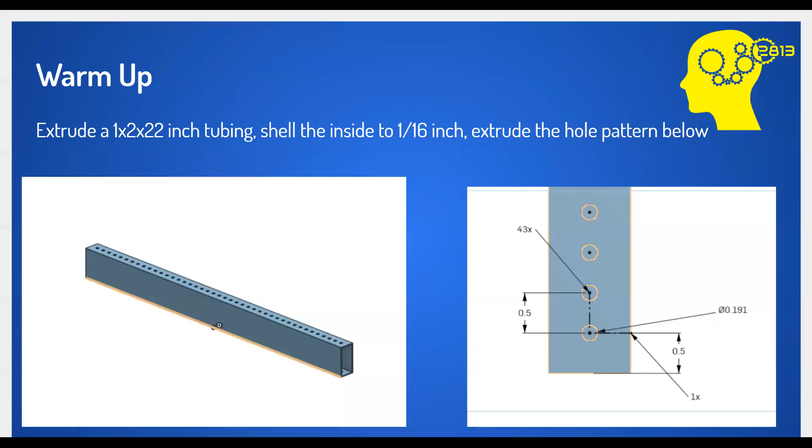Today we're going to be going over assemblies, importing CAD from WCP, VEX, and MKCAD. This is day 3 of hardware design training. So let's get started.

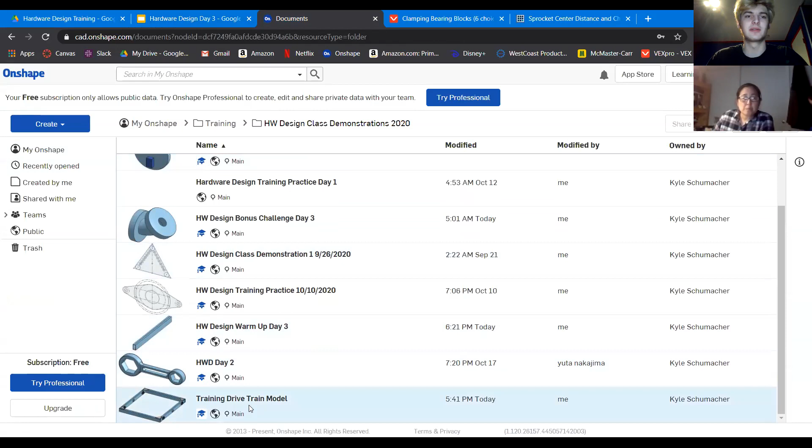So let's do a little bit of working with that. I actually just did this for a friend to show them how to do it. I'll delete all of that, and let's get rid of this. Okay, now it's completely blank.

So this is the Part Studio we made last time, and this is also new stuff. I'll actually delete this last sketch because I'll do it again today, and everything else is new. Or sorry, everything else is what we did last time. So we have all of these parts.

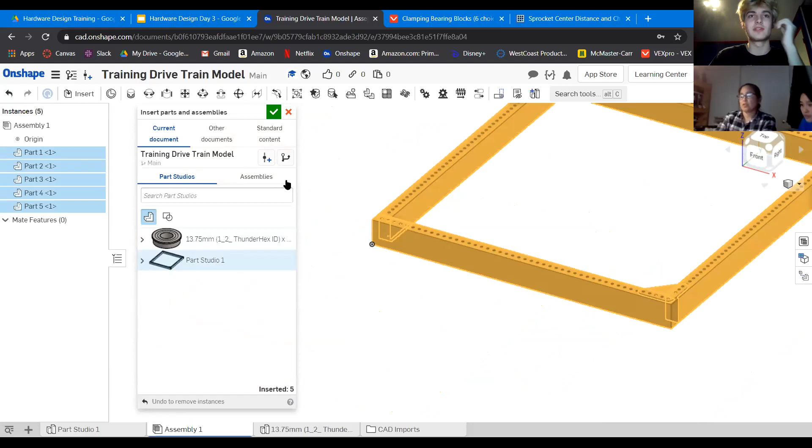And when we go into the assembly, we want to insert the new part, Part Studio 1. Let's make it a little centered. Okay, so when your mouse is in this area, it's going to default to the spot where it is at to the origin part, where it is in the sketch. So this corner right there is where I drew the origin for the first drivetrain sketch. So I'll check that. But none of these parts are fixed quite yet.

I just got an Amber Alert. That's not good. If there's any missing elderly in your area, please keep an eye out. Apparently it's a Silver Alert. Sorry, I was distracting.

Okay, so to fix this part, you're going to right-click on it and then press Fix. And now this can't move. All these other parts can move though, because they're all separate parts.

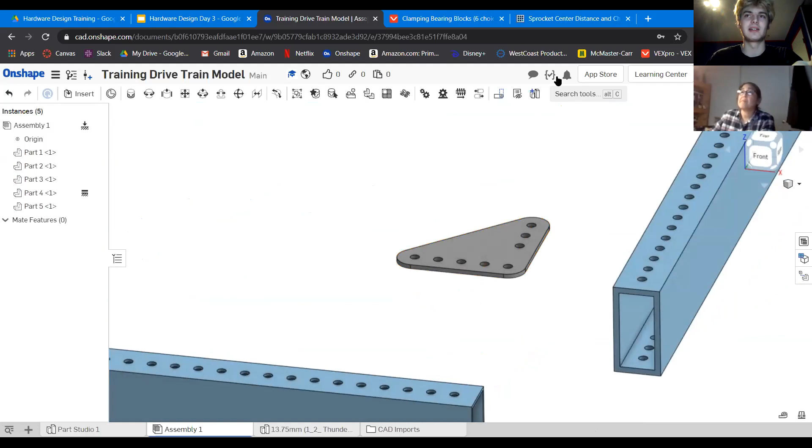So I need to mate them down so that they don't move. And to do that, you want to mate it in all the spots where you would mate it in real life, because that's the proper way to do it, so you don't have confusing things. So we don't weld these bars together, so you don't want to mate this face and this side. What you want to do is mate it at the holes in the spots.

Sorry, you have to go. Oh, okay, that's cool. Okay.

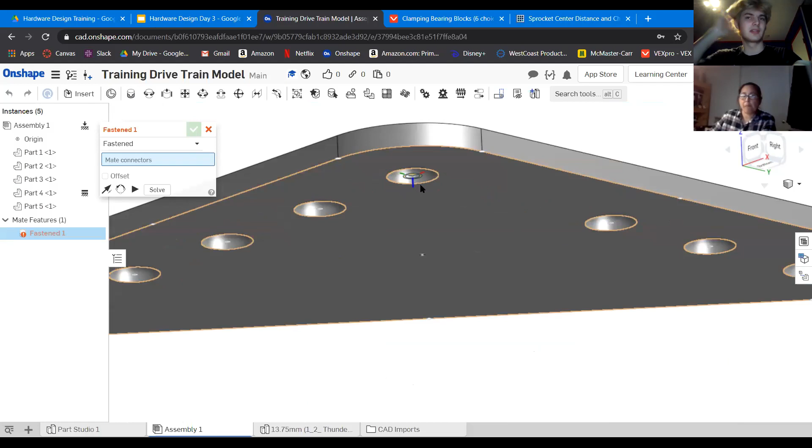So you're going to select Fastened Mate, or press M, and select the mate connectors. The mate connectors are automatically given based on the geometry of the sketch. So you can see there's a mate connector here, this little circle with the axes sticking out. You select that and then select the mate connector you want it to go to. So maybe I want it to go to this hole because I want it to connect there. So I'll select that and then they mate together.

Now, if this didn't automatically go to the right spot, I could also flip it around or rotate it to make it go in the correct position that I would want.

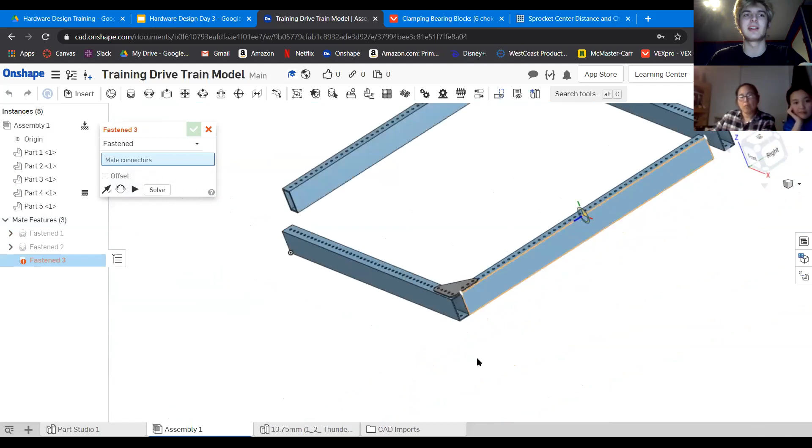So I'll solve that, and then it automatically opens up another mate, and I can start doing some more. So I want this part to also be connected to this, so I want it connected to this mate connector and this mate connector, and they snap together. It's pretty simple, and you can do that for all of them. But now we're out of things to connect because these aren't welded together, so there's no way to connect them.

So now we only made one of these parts. So what I can do, well, first one of the things I could do is go into this part studio and select the part and pull it out if I wanted another one. Or even easier, since I already have it here, I can select it and do a copy paste. So I can Control C and then Control V, copy paste it around the document. So now I have 3 others that I could put on, right?

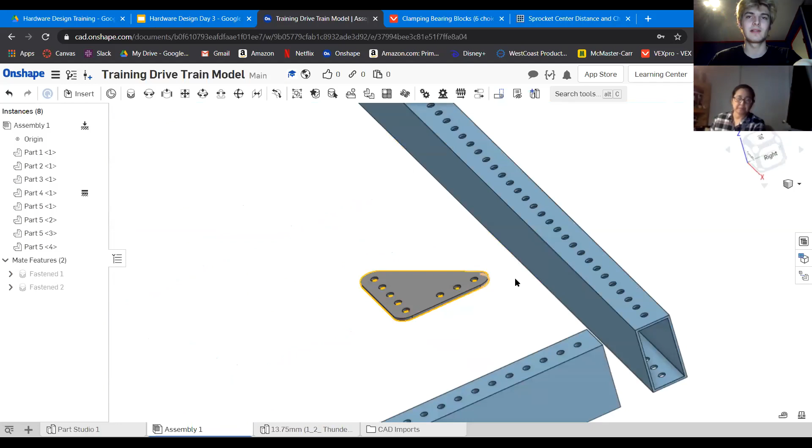So well, now I can mate them all up and flip that. And then it takes a little bit, but it just works. So that's cool.

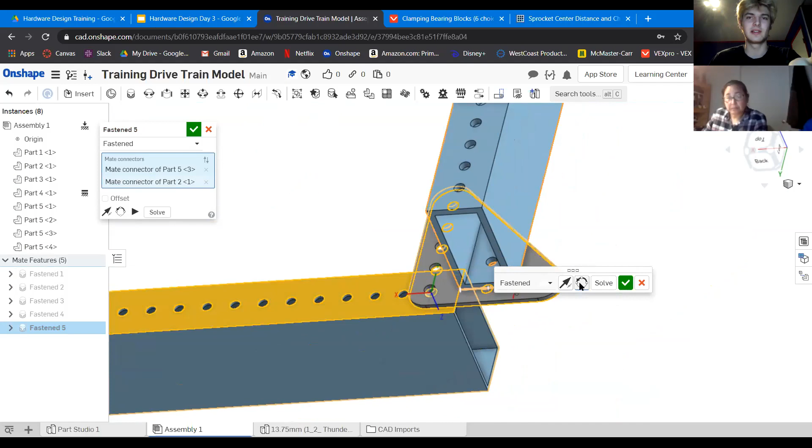So now I'm just going to go around and mate all of the gussets to all of the parts. See, this didn't go on the right way initially. I can flip it, and now it's correct. Like this, and put it here.

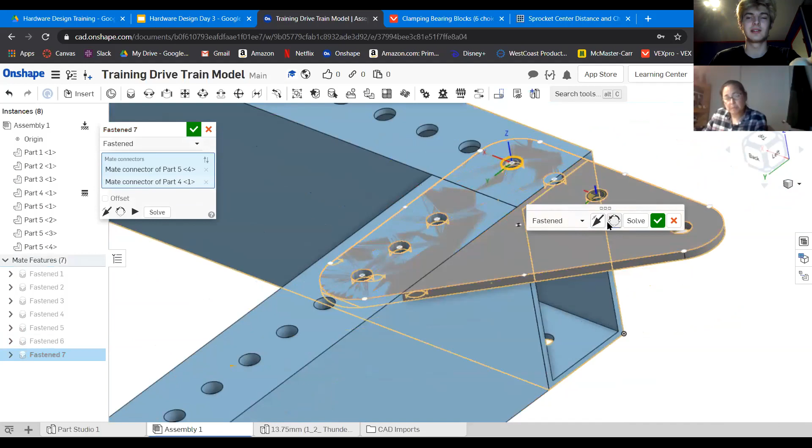And then for this last one, I can select it here, and then here, it's upside down now. I can flip it, rotate, and it's in the right spot. And I don't even have to mate this to this. I don't have to mate this piece to this gusset now, because this is already mated in place by this part in this gusset, and this gusset is placed here.

So this is already in the correct position. It doesn't need to be mated any further. Is everyone understanding this? Does it make sense? Do you guys know how to mate things now? Can you do like, yeah, thumbs up? I know you get it, Yuta, but like, okay, I want to know if everyone else gets it.

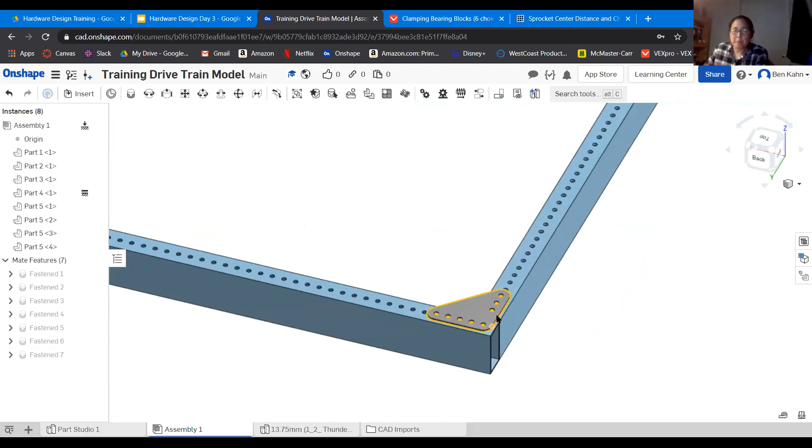It's like Ashton, Marcus, Pranesh. Do you guys all understand how to do it? Okay, maybe they're still working on their thing. I don't know. Okay, chat, kind of.

How do you flip it again? Okay, so I'll show you. So this is the first mate right here. When you're doing this mate, in this part, it says flip primary axis. It flips the side that's connected to the thing. The little arrow that goes back and forth.

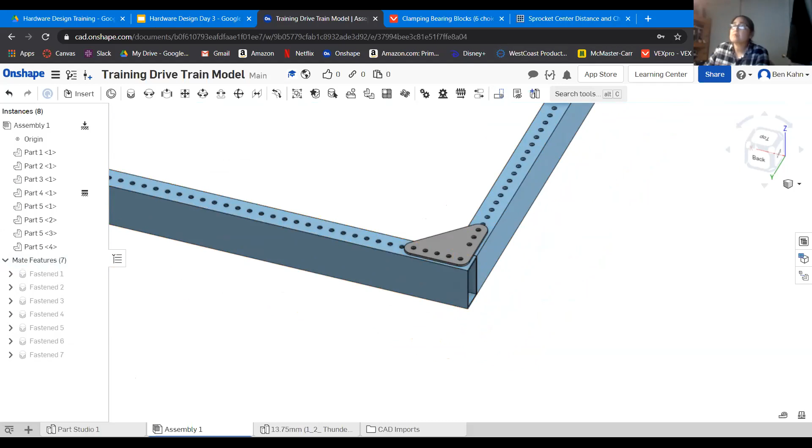Okay, cool. Can I move on now? Okay, I'm gonna move on.

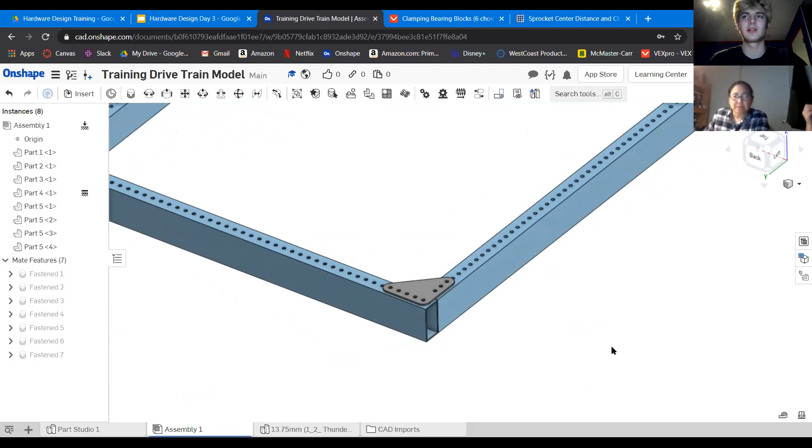So is everyone, since I'm not on that, on your... Yeah, I think Marcus and Pranesh said that they finished it or came close to finishing it. So yeah, I'm hoping at least, because I think that's what they said, but I could be wrong. But other than that, it's pretty simple. So hopefully you can pick it up.

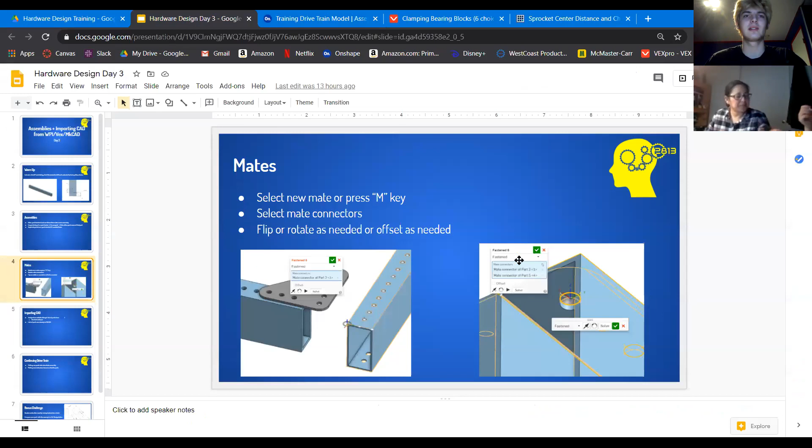Okay, so moving on, this is the last thing we're gonna go over: importing CAD. You don't always want to make all the parts yourself because a lot of them are standardized and you can just kind of get them from the internet or from the stores that we buy them from. So you can just download the CAD off of some websites, and then I'll show you how to import it into Onshape.

And I already did this earlier, so I'll just delete this, and I'll delete this too. So I'll show you how to do it. I was working with this earlier. So if I wanted to download a bearing and put it into my CAD, this is a website that we go on a lot.

If you just type in VEXpro, it should be the first thing that comes up. And you'll go into this sub website. There's a bunch of different parts that you can get from here, a lot of which that we use, like a lot of motors and different things. So bearings is one of the things we can buy. I think we have a different source for bearings now, but it's the same CAD pretty much. Like they're the same size.

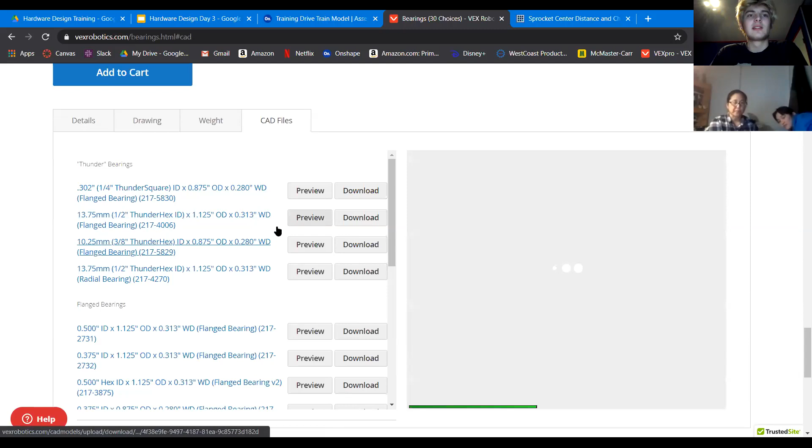That's what ID stands for. So you can preview the CAD on here to make sure it's the right thing, right? And then you can download it, and it downloads as a step file.

Now I already downloaded it. I don't want another one on my computer. So I'll just go back in here, and if I wanted to, I can press this plus button right here. Or I'll even delete this. I don't know why this is still here. Okay, well, it just automatically makes this folder that you can't delete, so that's fine.

So you would import a new thing and go, I think it's in my downloads. Oh, and it's gonna be slow today, isn't it? Okay. I really wanted to show you how to do this. Oh my God. Where did I keep it? Okay.

So once the files load for you, you're going to want to just select the file, and then it'll give you an option that says import to Part Studio or import to as its own thing. And you'll just not click anything and just press import, and it'll go into its own folder, and it'll give you a spot for the file and a spot for the part.

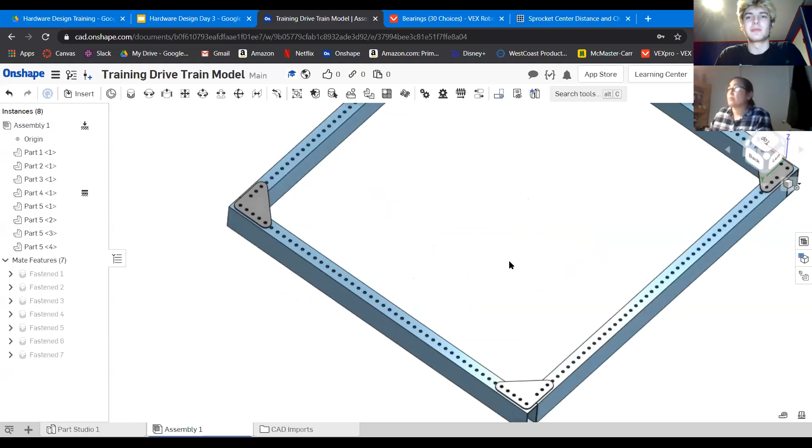It's not loading for me right now because my computer is being annoying. So whatever. It can be that way if it wants to.

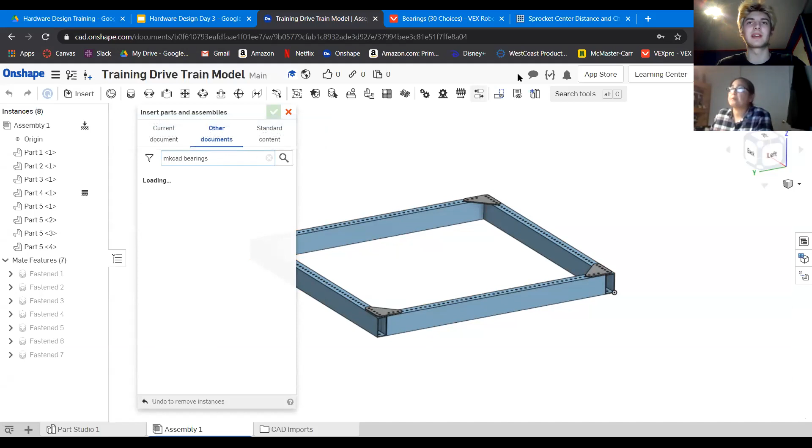Okay, and that was, I think, the last thing. But the important part to go over is that you don't actually need to do that, because there's a huge library of parts that you can get off of MKCAD that will download, even if my computer is slow. So if I go to MKCAD bearings, it's usually sorted by the names that it has on the VEXpro website. It'll take a little bit to load.

And then I can find the same part on here off of this library. So like this is the Thunder Hex 1.125 flange bearing. It doesn't say half inch, which is annoying, but it does say the part number, so 217-4006. So if I go on here, I can see it's the same part number, right? Which is this part right at the end. So that's the correct part that we want.

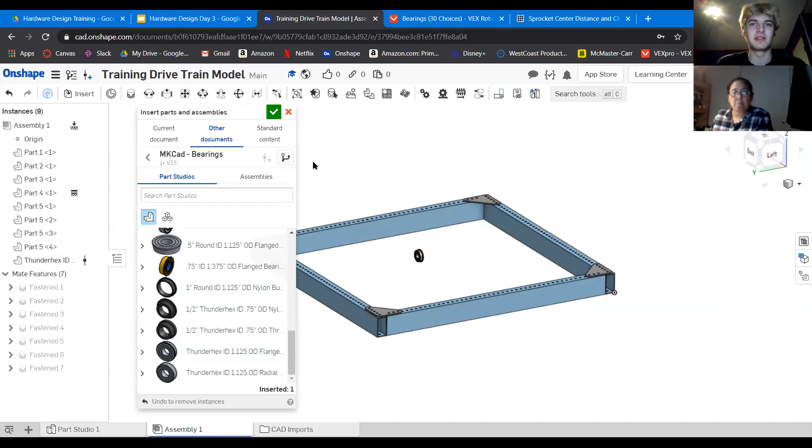So we would just click it and import it, and it's right here. And you have a new part in your assembly. You didn't even have to make it yourself. Pretty cool. Now we can just delete that because I don't want it. Okay, I think that was it.

So today we're just going to be continuing the drivetrain a little bit further. And I'm going to show you how to get the parts from VEXpro and make cutouts for them, which is going to be more sketching, but we'll put the parts into the assembly as well. This is going to be a sketch that is, I guess, on the more complex side, but not really, so you guys should be fine.

And also, if you guys want to do this bonus challenge, this was really fun for me to do, which means it was a little bit difficult. So if you guys want to kind of explore the sweep feature, which I didn't really go over too much, it'll help you out with this. This is some good practice.

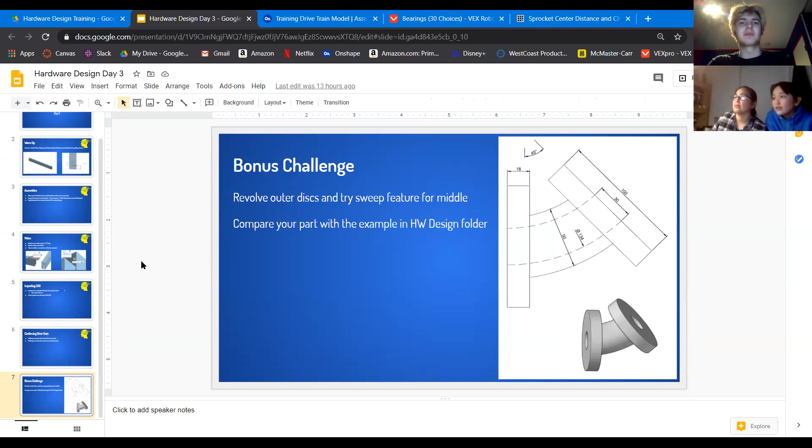So without further ado, let's start doing our drivetrain a little bit more. So we want to put wheels into this area right here. So to put wheels in there, we need a bearing and a shaft and a block to hold the bearing in place. But for that block to fit into this tubing, we need to make a cutout for it.

So we can actually find that block on VEXpro, which is the site that we just went on. And then it's going to be in VersaFrame. Actually, I think I just looked up bearing blocks. Bearing block.

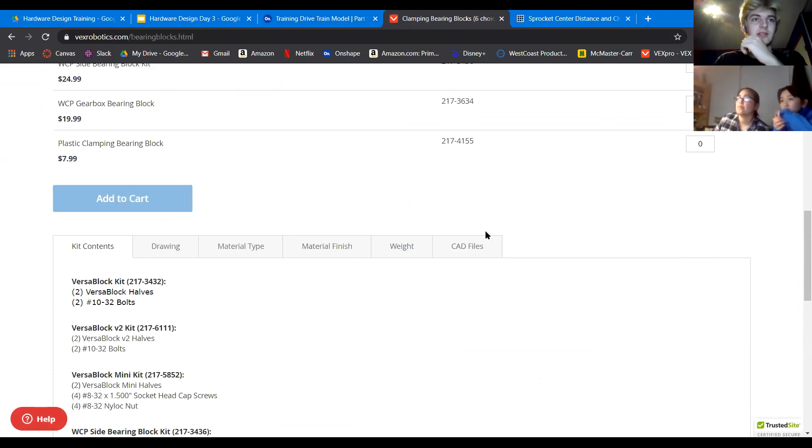Okay, so there's a few different options, but the ones that we normally use are not that one, this one. So we use this and this one for the sides, side wheels, and then this one for the gearbox wheel. So we'll start here, and we're going to go into these sketches.

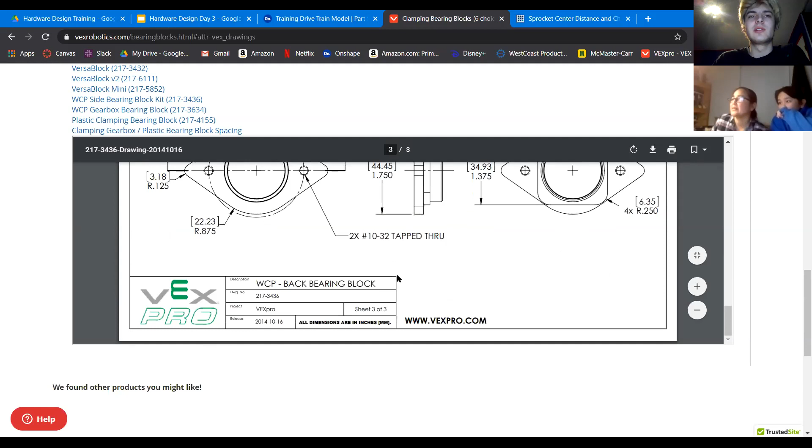And we're going to look at the dimensions that it gives us so that we can fit it into our drivetrain.

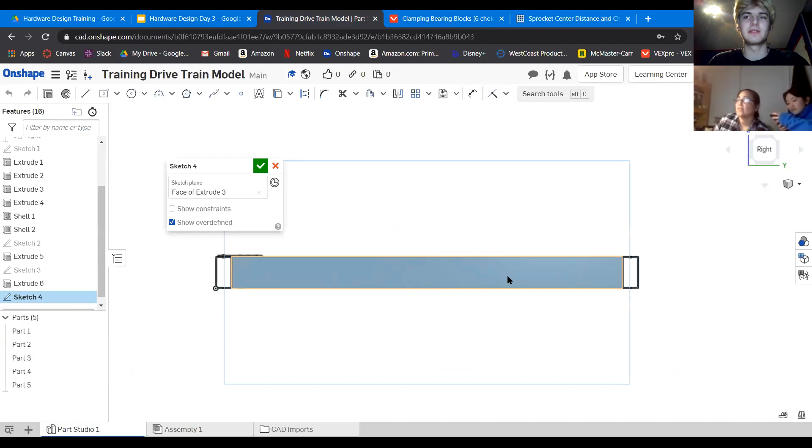Okay, so let's start with this one right here. Let's make a new sketch off the face of this side—this inner tube, the one surrounded by blocks on both sides, not the one with an open end. This is the side you want to put the wheels on.

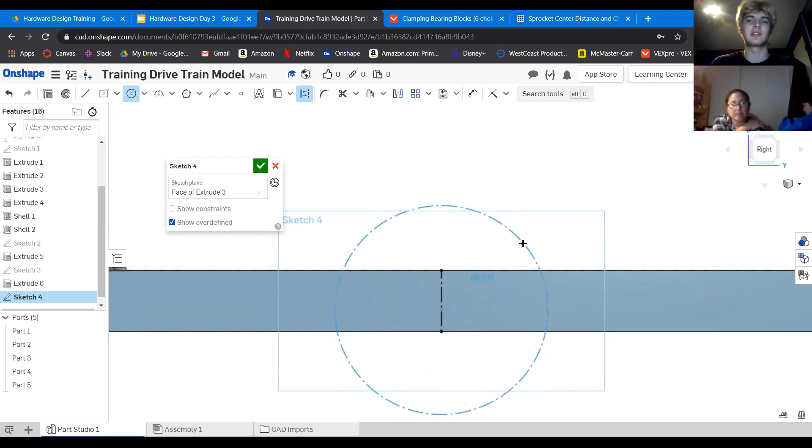Let's start our sketch by adding a vertical mirror line just in case we need it, and then we'll start CADing out the wheels. We'll start with a circle, and we don't want to put it in the center because we want it a little lower so we don't get stuck. These are going to be construction lines because we're not actually extruding the wheel here, we just want it for reference.

This is going to be 4 inches, because that's how big our wheels are. We also have 6-inch wheels that we use sometimes, but we'll just use 4 inches for this drivetrain. During build season, if it happens, we'll figure out which wheels we want to use. Like last year we used 6 inches because we had to go over a bump in the course—that was part of our design.

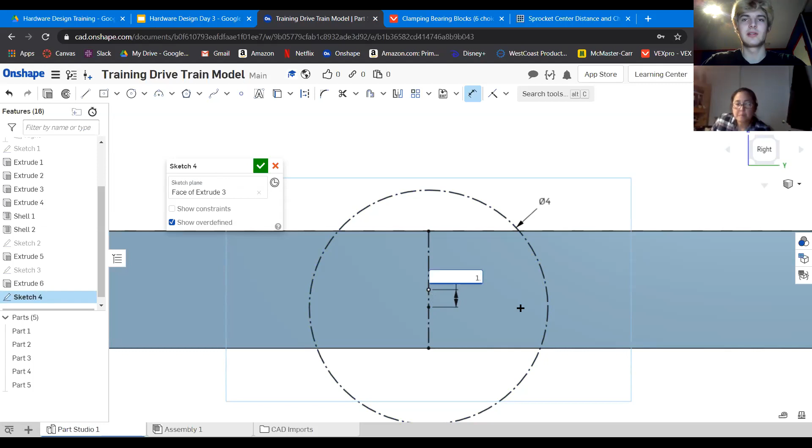Now let's give this a bit of a center drop—let's call it 1/16 of an inch—just so it's a little lower and has some tilt to it and doesn't get stuck or beached, because flat wheels can be bad, especially in a West Coast drive. Now the side wheels, we do want them in the center because we want them higher up than the bottom wheel.

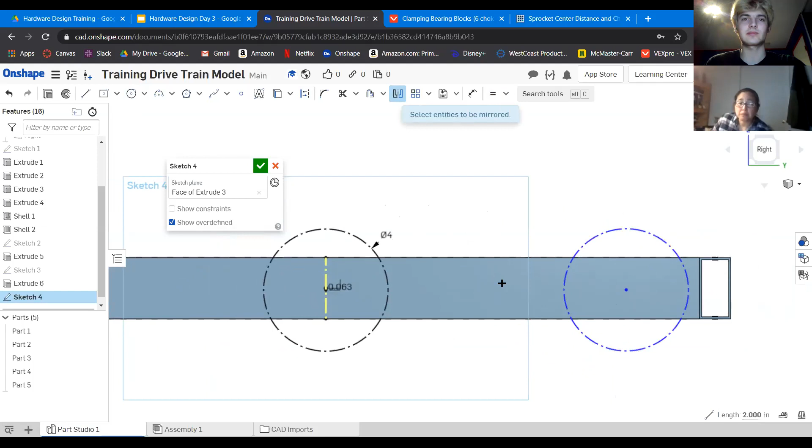We're going to make that construction and make these two of equal size, and then we'll mirror this over onto the other side. Then I want to make all 3 of these. This is the center point, not the wheel point where you're putting it. I want these all to be horizontal and of the same distance.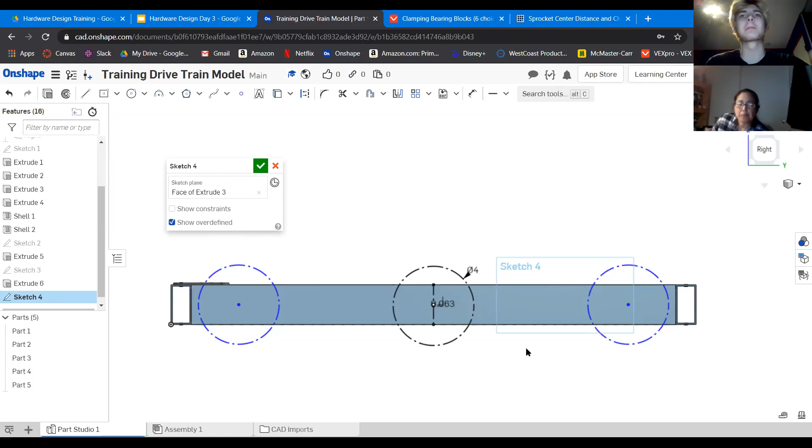Now I want to space them out accordingly. We'll go into this more next week, but the spacing from center to center is going to be based on how many links make a full link in a chain. Our chain pitch is 0.25 inches, and our sprockets are 16 teeth each, so I got a center distance of about 9.5 inches that I'm able to use. It really works for any multiple of 0.25, I think.

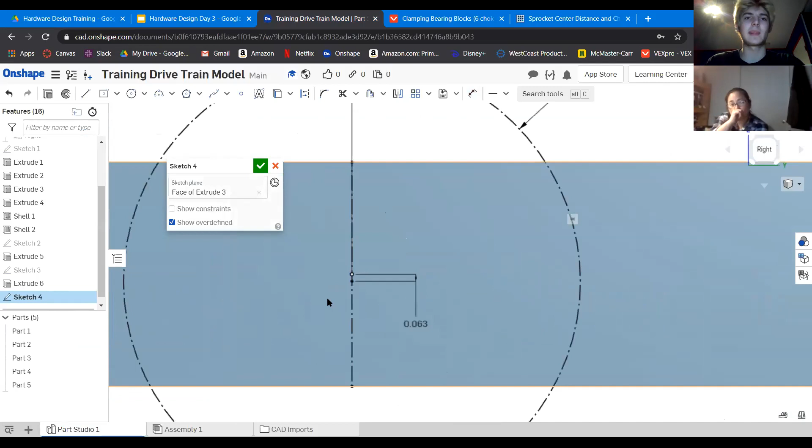So I want to select this for the dimension to the side and call it 9.5 inches. You don't want to select this bottom one because it'll make a very slight triangle or angle—you might not notice it if it switches between horizontal distance and angle distance in the CAD since it's so minimal. But the chain is really, really touchy, so even a slight difference in horizontal distance can make a really big difference in chain tensioning, which we'll get into more next week. These are mirrored, so it's the same distance and you know where it is.

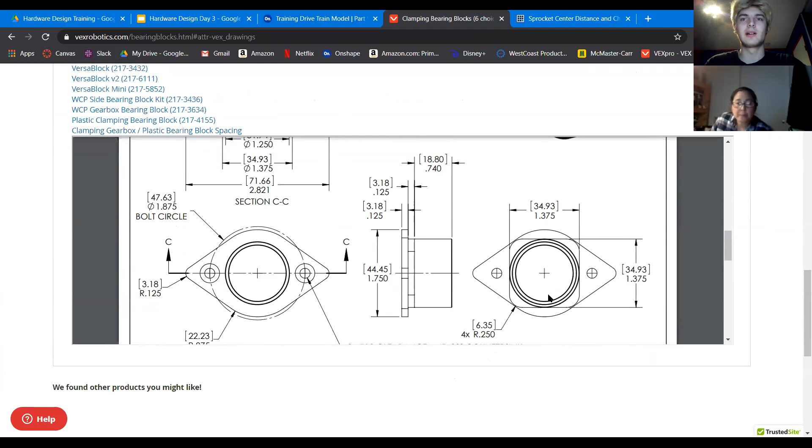Okay, that was some other stuff. Now let's get back to these bearing blocks I want to put in. So how to explain this—there's this kind of curved square that goes into the tubing that you press it around, and that holds a bearing in this slot right here. Let's make this shape in the tubing.

So let's do a rectangle, and over the dimensions—you can see right here it's 1.375 by 1.375, so 1.375. I could make this equal, but I want to display the dimensions, and I also want it to work with the fillet we do in the next step.

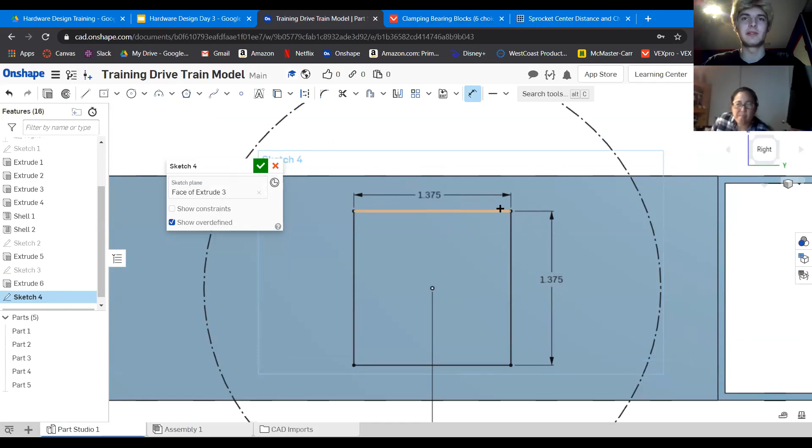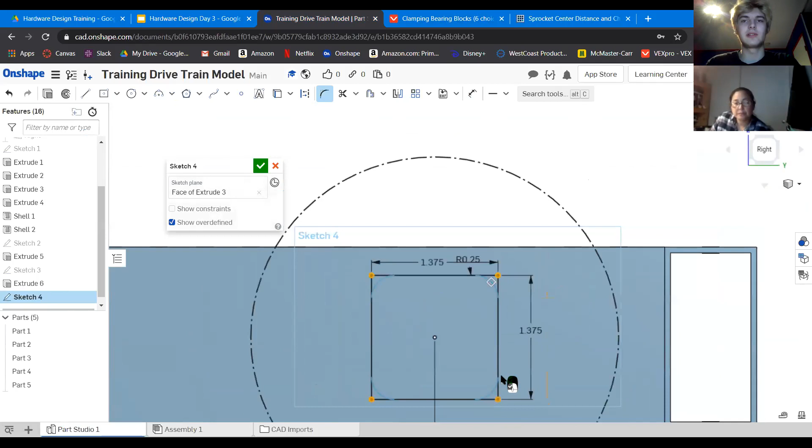So I can do a sketch fillet—that's this button right here, which is the same as an extruded fillet you'd do on a 3D part, but it only occurs in the 2D thing. It just makes curves, pretty much. You can set all of those, and the radius is 0.25, which is the one we needed. Cool, so we'll set those—it's all defined.

We also need holes on the outside to mount it. So these two holes also need to be made to press it in—this presses in, but it also has these two so you can bolt it in and it's nice and shut. So you have to find the hole dimensions, which is right here. This is called a bolt circle, which follows a radial path, and you can see where the bolt would be on the outside when mounting it.

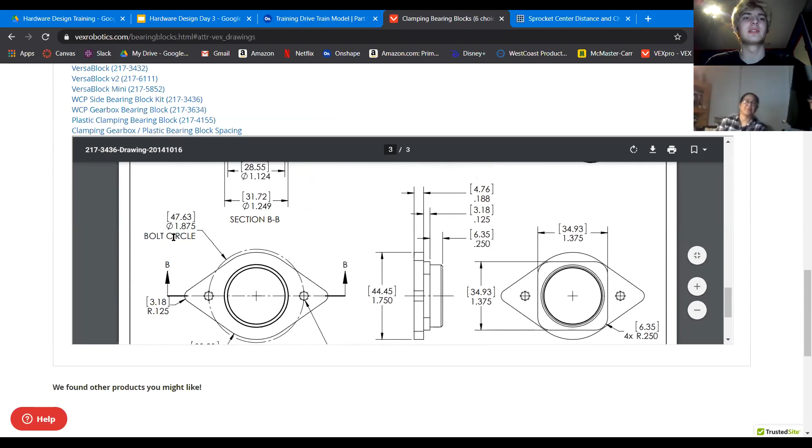So this is 1.875 inches for a bolt circle. And then these holes are number 10, or 10-32 bolts, which all you need to know right now is that the hole size is going to be 0.191. If you have any questions about different bolts, I can talk to you about that later. So, 1.875, and then you're going to want a circle horizontal to the center of the part, and call this 0.191.

And then mirror this over.

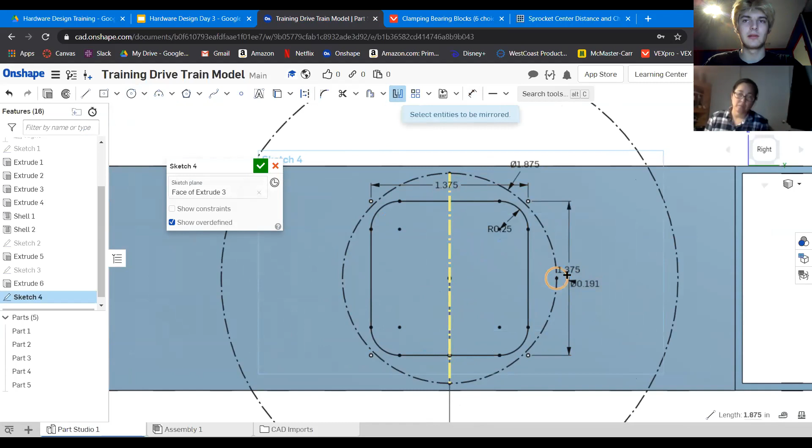Now I have two holes. I want to mirror the whole thing over so it's on this side too. So I'll do a mirror, select this line as the mirror line, select all of this, and it appears on the other side just like we wanted it to.

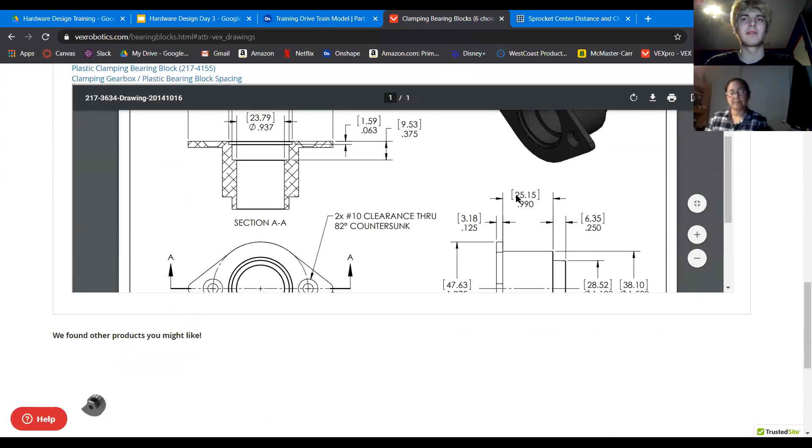Now we have to do the hole here in the center, which is going to be a different part. I don't know if it's on this PDF, I think it's on a different one. This one—right, this is the gearbox bearing block, and we usually put the gearbox in the center.

You can also put the gearbox in the back or the front, but that's some different drivetrain stuff, and you can play around with that later if you'd like. It's not too complicated, it's just a difference of where you place the double sprocket. But we'll get into that later also. Hard to not talk about these things we haven't learned yet.

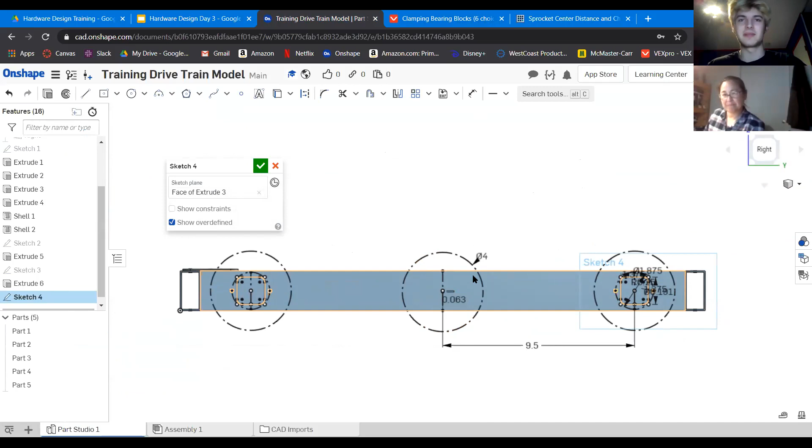Are you using a different bearing block because the motor is driving the center wheel only? Mm-hmm. So this is the block that goes to the gearbox. So on these side situations, you're going to want the block on both sides.

Oh, someone is rolling something outside my room.

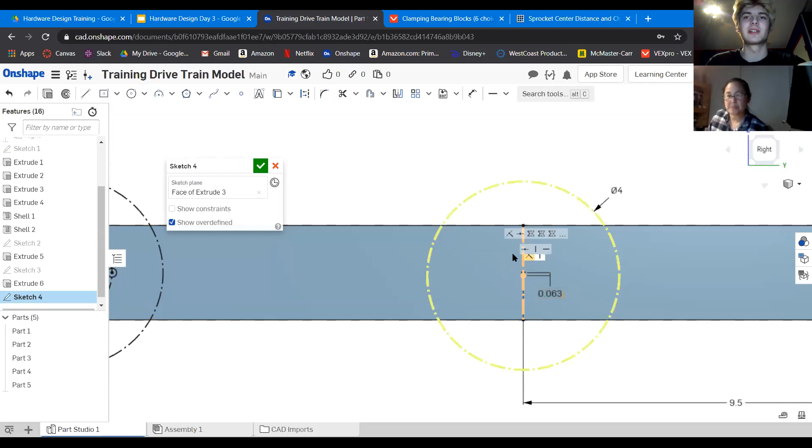So you want the block on both sides so that the shaft is retained on both sides. But the shaft is only retained by the gearbox on one side, and then the other block is on the other side. So they just make it different.

And the gearbox is where the motor is housed? Is that what we're talking about? Yeah, the gearbox has the motors and the reduction gears, and it outputs a shaft which goes into the bearing, which goes into the block, which is what we're making a hole for. So yeah, I probably should have clarified that.

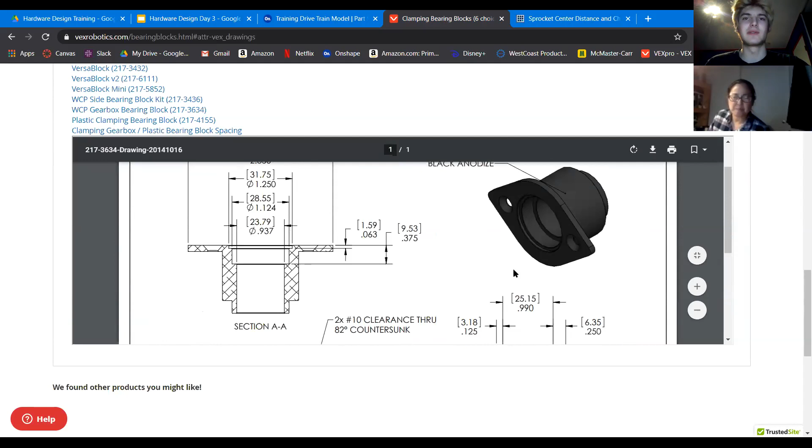So this kind of just goes into the tubing hole that we made, which we'll do today. This also has a bolt circle, but the part that goes into the tubing is this fat part right here, and that has a dimension—you can see in the side view here—of 1.5 inches.

So I can go over, put the dimension at the center of the wheel, not at the center point right here—it can be easy to mix those up. Set that to 1.5 inches.

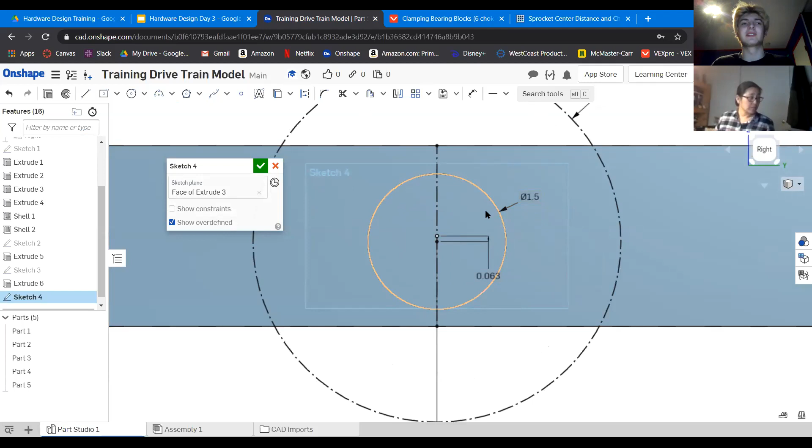Actually, usually what we would do is even tolerance it a little bit more. I'll teach you about tolerancing later, but it pretty much just makes things a little bit bigger, because when you actually put things together, it's really hard to get a 1.5 inch piece into a 1.5 inch hole. You want it to be a little bit bigger so it's a bit looser, but not too loose so that it falls out.

So a lot of times we'll say like 1.5 plus 0.003 or something, so like 3/100ths—I think that's right. I don't know, I'm bad at math, but yeah.

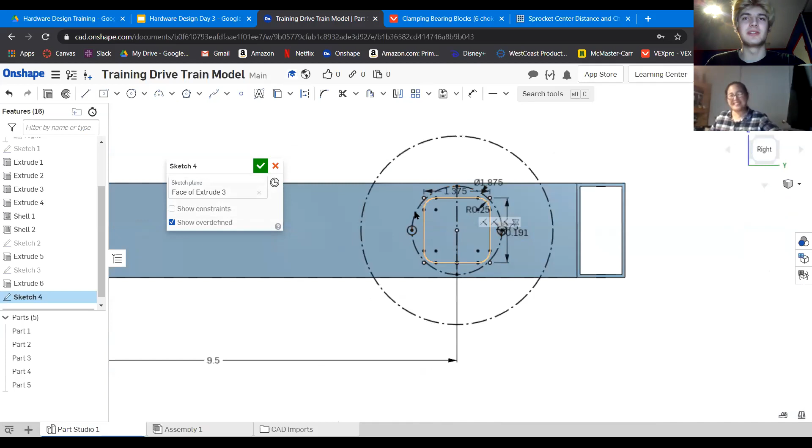We could also do that over here with an offset or something, but that would be a little bit messier. Actually, yeah, let's do it. Did I teach you guys offsets?

Yeah, so you just want to press O and select all the spaces that are going to be offset. And then you can set the offset to... actually, we don't even need to do that.

I think we can just change this, yeah. So I can put it to 1.375 plus 0.003, and set this to 1.375 plus 0.003. And that should keep the same thing.

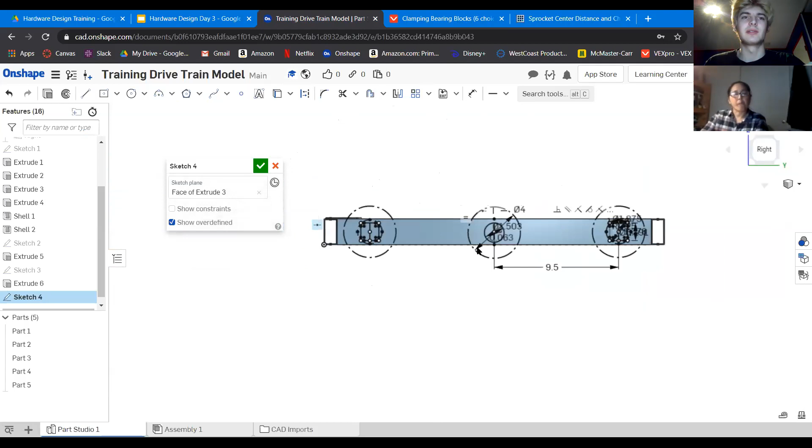I was worried about the fillets because I thought they might change, but I don't think they will. And it should change on this side too, because it's mirrored. And I think it did. So, yeah.

So now what we're going to do is put a bolt circle, which remember was 1.875. That's a different line—call it 1.875. Was it? Yeah, this bolt circle hole.

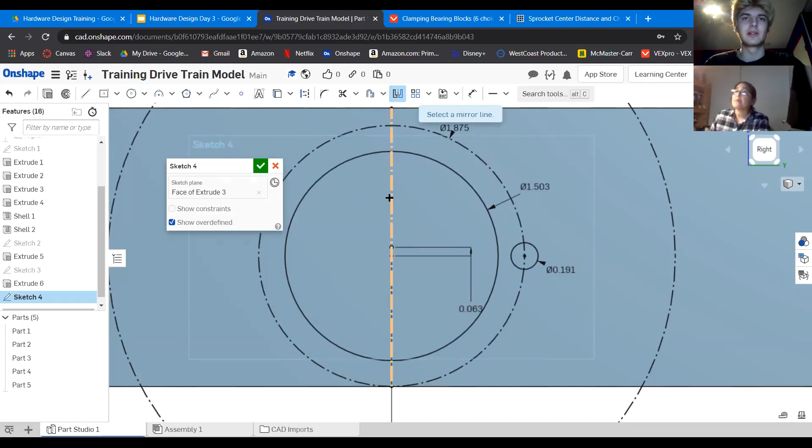And then we can put our circles horizontal to the center of the wheel and call it 0.191, and then mirror this over. Now we're all done with this part of this sketch.

Okay. Does anyone have questions about what we just did?

Or why we did it? Or why we did a certain thing a certain way?

Can you clarify again why the center wheel is not centered on the drivetrain?

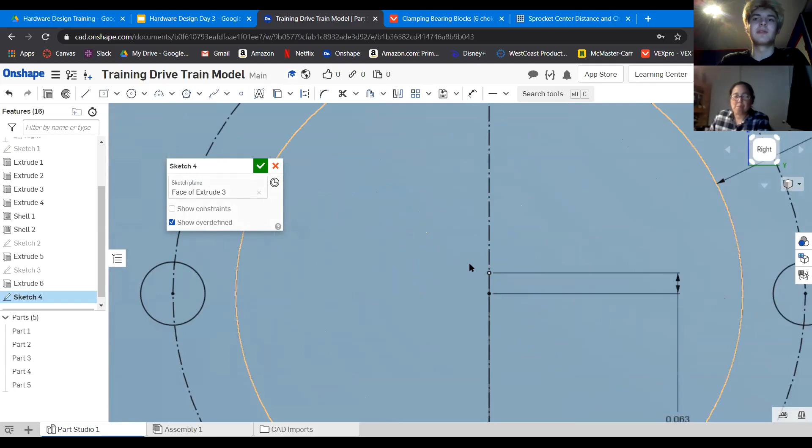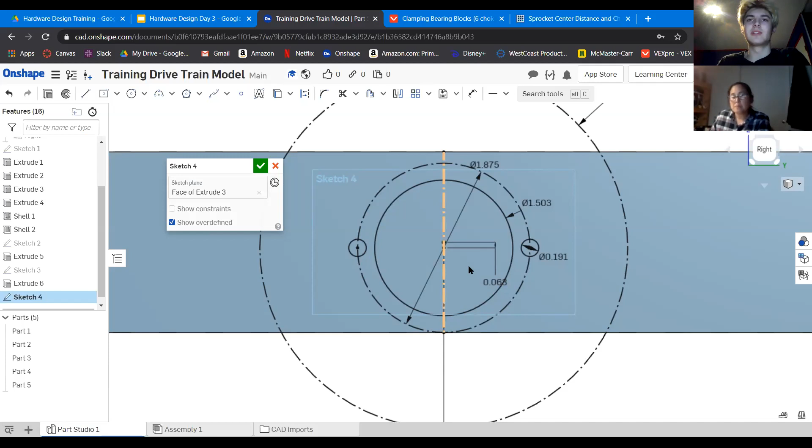What is the frame drop? We call it a center drop because we put this wheel ever so slightly lower than the actual center of the tubing, right here. When you're driving with all 6 wheels flat on the ground, it can get beached pretty easily if you come up to a ramp or something and have 2 of your wheels stuck on something. So this gives it a little bit of a tilt so it can move forward. These ones are a little bit off the ground, but not really—they're all on the ground, but this one's a little bit lower. It's kind of hard to explain, but this is just one of those trust-me things. You want to do this because it helps with the ground if you're tilting it.

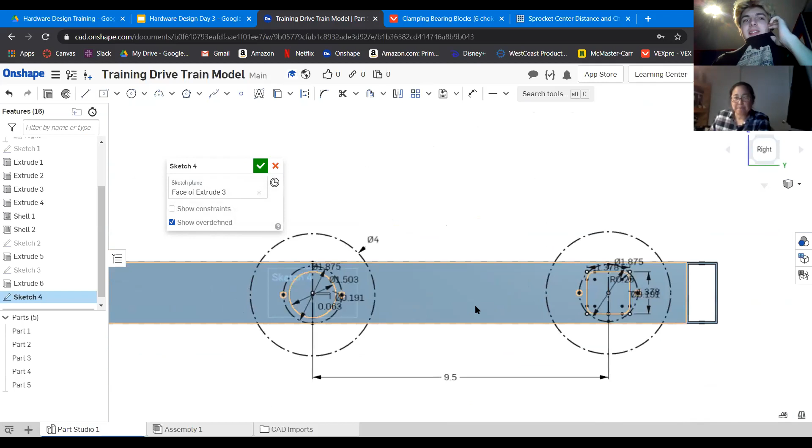Okay, so anything else from the audience? You drew in, sorry, I'm just going to keep asking questions. You guys chime in when you have other questions. Yeah, that's fine, I'm probably the least knowledgeable about robots, so I'm just going to ask.

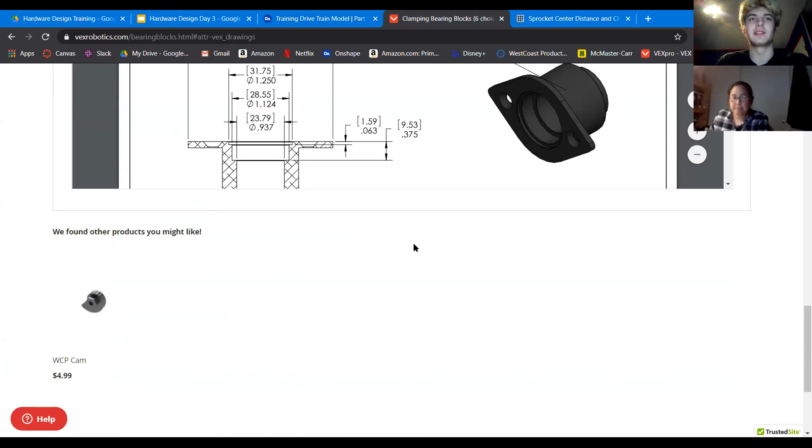But the parts that we drew, the rectangle with the filleted edge at corners and the 2 bolt holes, are those going to be sent to CNC to cut out, or how is that used? Yeah, you mean how we cut out the tubing? Yeah, we cut this out on the CNC. This is actually filleted because we wanted it to fit this piece right here. But it works well because they know that people are going to be cutting it out on a CNC, which can't do sharp corners.

The CNC just takes this file, or how does it communicate with the CNC? How does the CNC understand to cut these out? Do you convert the file to something it understands, or does it just take an Onshape file? I guess that's kind of a larger question, but yeah.

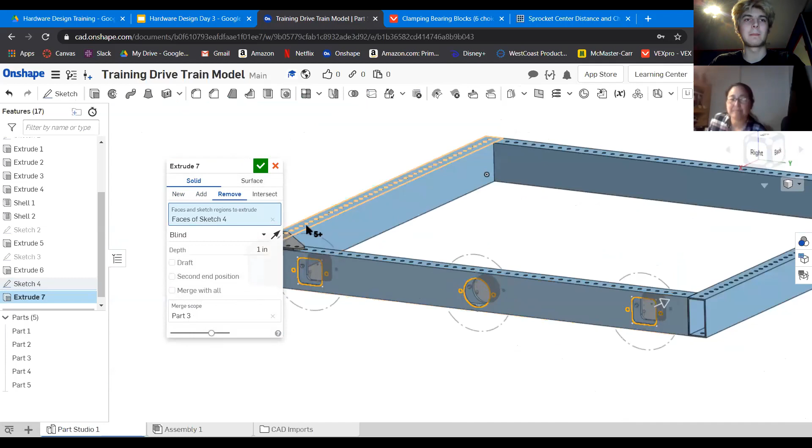If I wanted to CNC something, let's extrude this first and I'll show you how. I want to remove this, and then we'll do it on both sides, even though these aren't the same part, remember. It's going to cut through all, and in the merge scope we'll add this part so it affects this part also—we're cutting through both sides, the holes affect both sides.

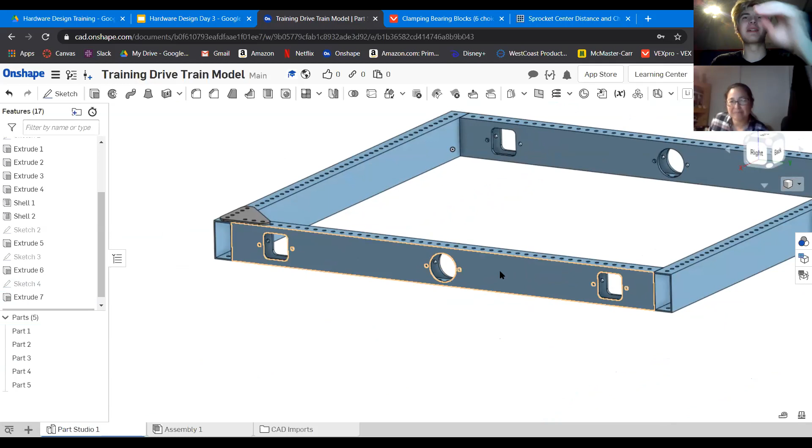Okay, so if I wanted to CNC this, which is not what I was planning on going over today, I would select this face for the tubing, then export as a DXF or DWG, download it, and go into Cut 2D Pro—I'll show you.

The fabrication team will go over CNCing and stuff, but you hand it over to Fab, right? Yeah, just hand it over to fabrication, give them the CNC code. Actually, a lot of people in fabrication know how to do CNC code, so they should be able to do it also. But yeah, it just comes out like magic—it just appears in our hands so that we can make our drivetrain.

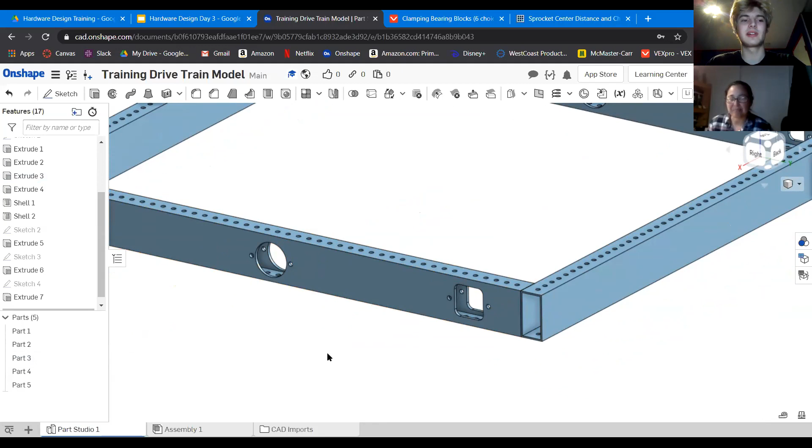Okay, so now that we have these holes cut out, and you can see the spots where everything is supposed to go, we can now put our different pieces in. So let's go into Onshape, and let's go to VersaFrame, because that's the section of VEXpro that we're in—when we go here it's VersaFrame, all of this stuff.

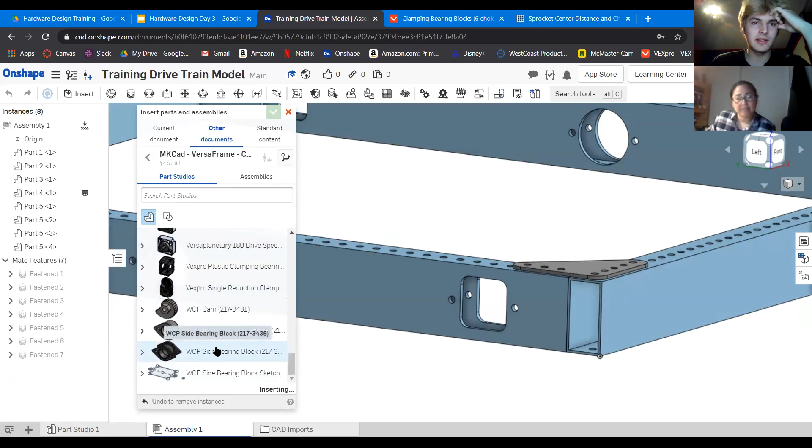So what we're gonna want is this thing, right, because this is the drawing that we looked at. So these are actually 2 parts—it's just a part studio. We'll select these and group them together because they are mated in a specific way. These aren't flat up next to each other.

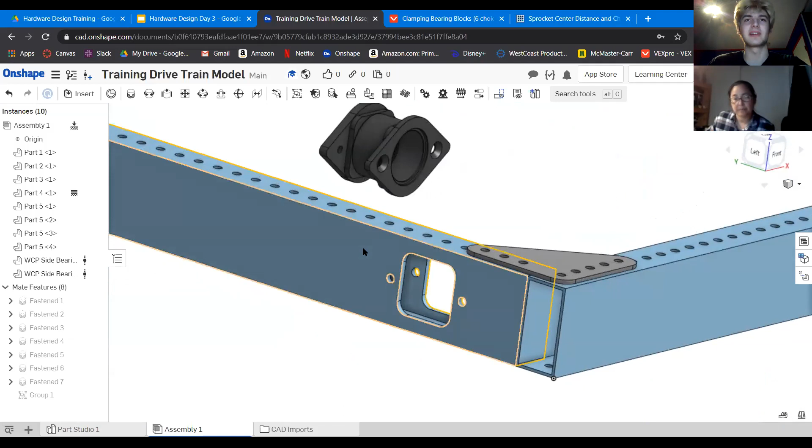There is a 30-thousandths... spacing in between them. Otherwise it would crush the tubing because it's just ever so slightly bigger, just to make us work for it. So now we can mate it here because this is where the bolt would go, then mate it to this spot, right, and we can see it all lines up. All right, everything works, check that.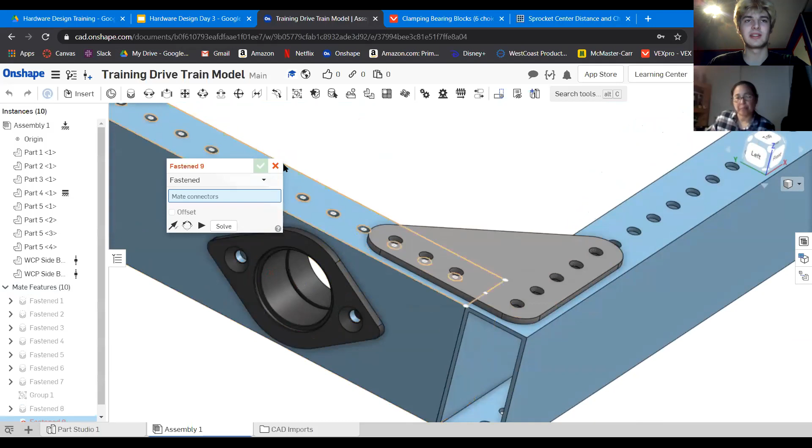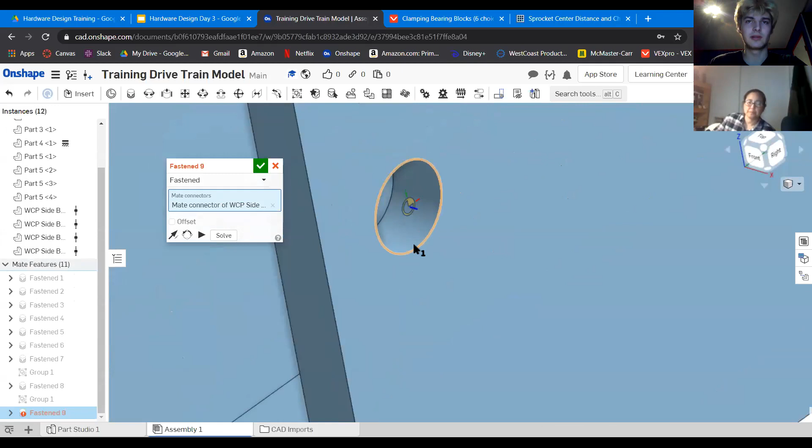It's solved. Okay, now I think if you guys are okay with it, we can do some linear patterning. I'm gonna check the interference here—it's not, no interference. Okay, so we will linear pattern. Actually, I'm gonna do it on both sides, so I'm gonna copy paste this group, and it's still grouped together. Then we can do it on the other side. Mate this spot to here, flip it and rotate. And we're good.

Check interference - no. What I'm doing here is checking if Onshape sees two parts intersecting; it'll show red cross hatches to indicate interference, so you'd want to change something. But you have to check it first. Since there's no interference, it won't show anything.

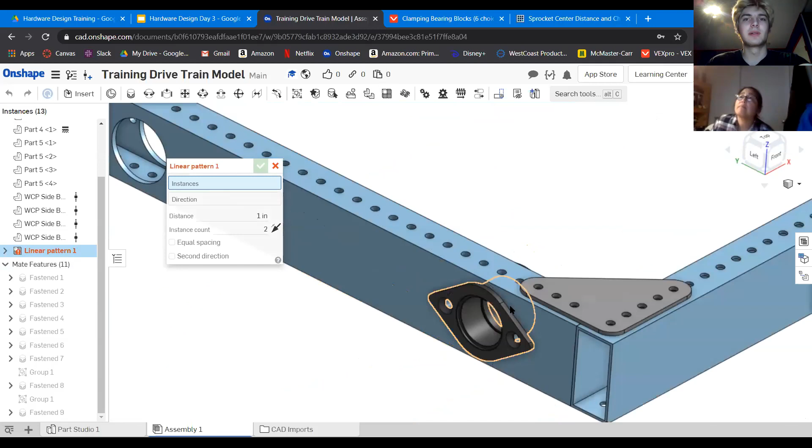So now I can do a linear assembly pattern. What I want to pattern is this part, this part, this part, and this part. The direction is going to be just this line, or actually any of these lines would work - it's just showing the linear direction you want to pattern something in. You can already see it's patterning right here.

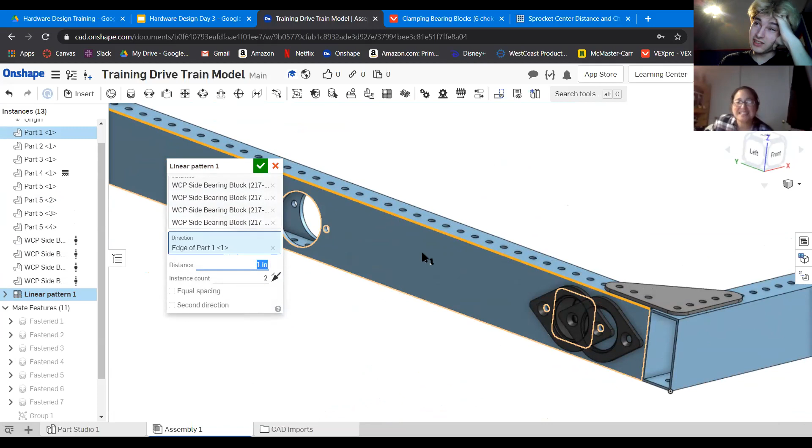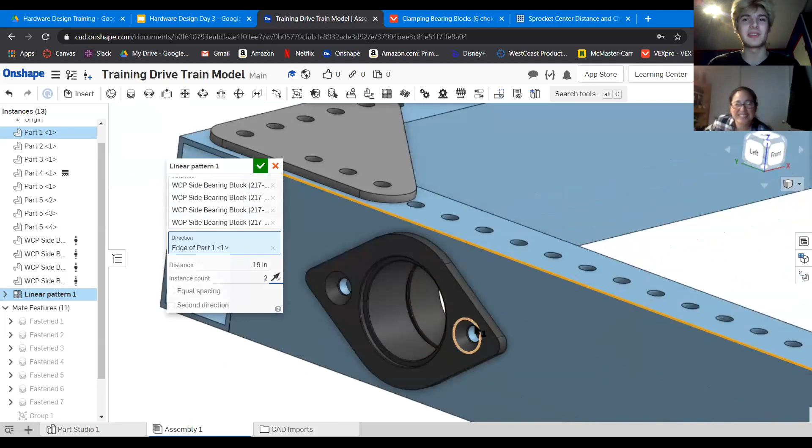The distance is going to be 2 times - I think we put the wheels at 9.5 inches away from the center, so 9.5 times 2 is... 19, yes. This goes in the other direction initially. Thank you, Yuta, I'm sorry, my brain is not good at addition. I can do complex integrals and derivatives, but not addition - my brain just does not work with addition.

So those are linearly patterned. You can also do a circular pattern, and it works the same as you would with a sketch linear or circular pattern. So now we have those two in there.

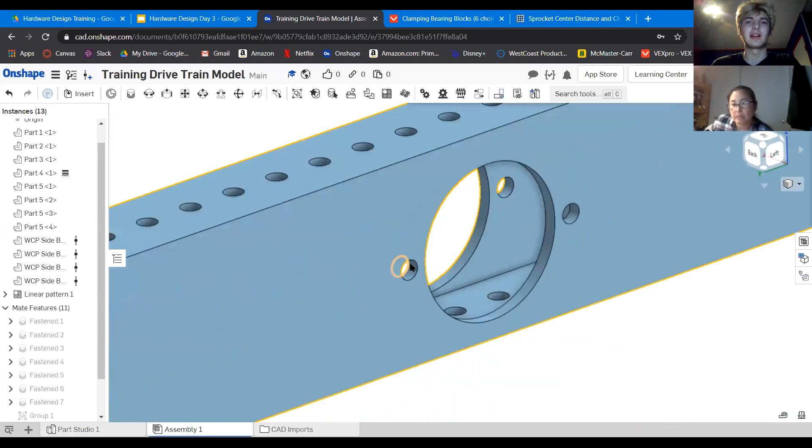They're ready for bearings to be put in, which we could even do right now if we wanted. I'm not going to put this part in the center bearing block yet, because you actually want to put that with the gearbox, and that's how you attach it in there. But we'll get to that another time - you guys are going to like gearboxes, those are fun.

So now I can put in some bearings. Let's go into MKCAD bearings. If you guys don't know what a bearing is - if you ever had one of those toys that were really popular like two years ago, fidget spinners, those are the things that spin around in the center. You have a skateboard, the wheels are also on bearings.

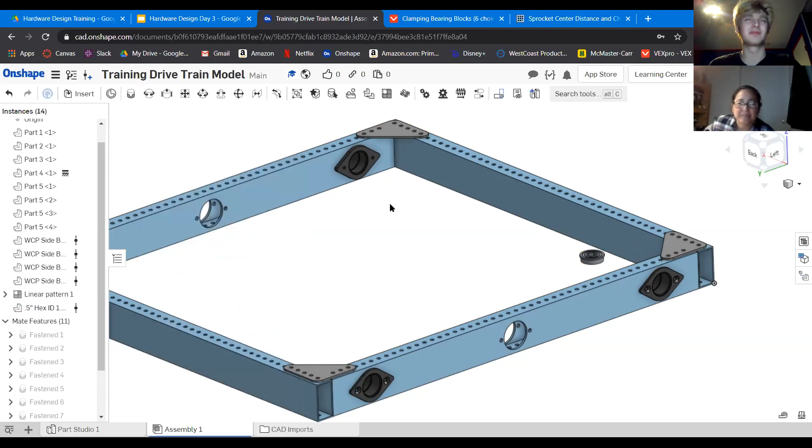Yeah, skateboards too. So I want a flanged bearing with a 1/2 inch hex. I'm not going to use the 1/2 inch ThunderHex because these are like really high torque mechanisms, relatively high. Usually anything driven by a gearbox, an actual motor that's torquing it, you would want an actual hex that lines up with this spot, not one that just kind of goes into a round part.

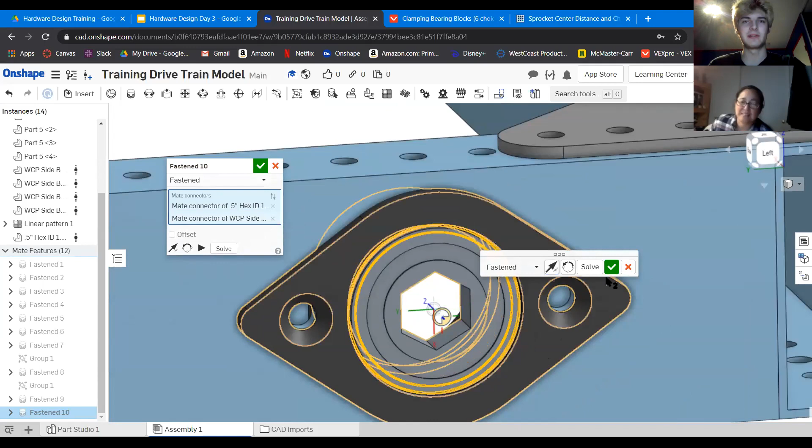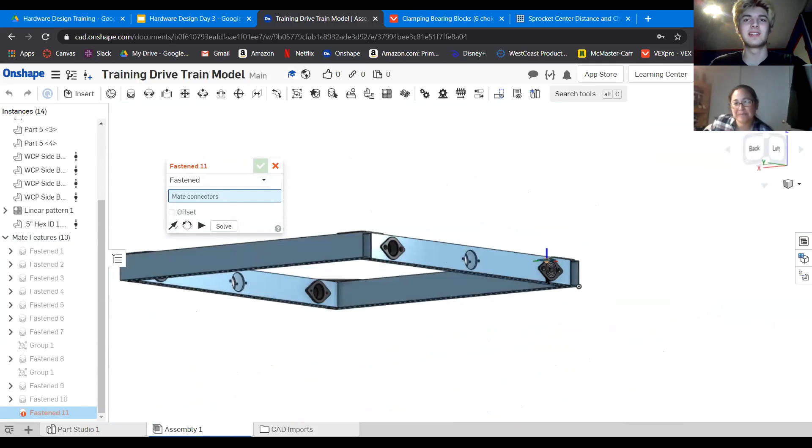So I can mate this side, which is this mate connector right here, and just pop it in here. It's backwards, so I can flip it, put it there. You know what really bothers me is that Onshape does not have assembly mirroring - that's the only thing I don't like about it. Every other CAD program I've used, like SolidWorks and Fusion, they have assembly mirroring so you can just flip it onto the other side. Doesn't do it here. Does not want to.

But that's fine. So I would want another bearing, put that there, and let's mate it - that's the right mate connector to this face, flip it, and it's in. I think I could linear pattern it onto the other side, but that would be kind of difficult to get the right distances, I think.

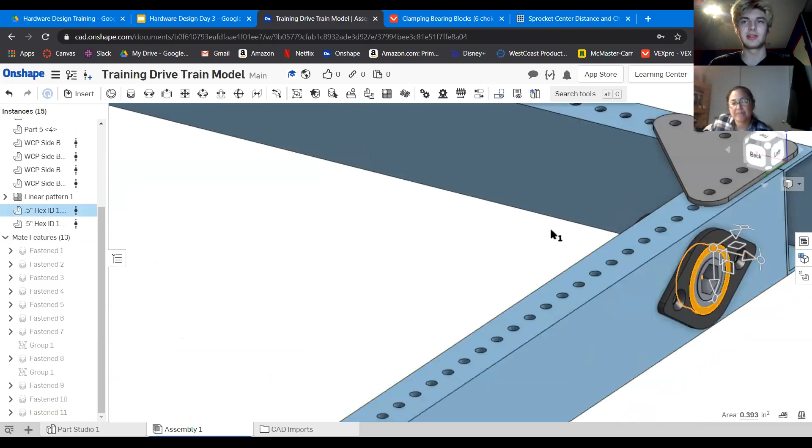So let's just - what did I just do? That's not good. Like that. Two of them over here, and it's not the best spot, but it works. Pop them in here. Good.

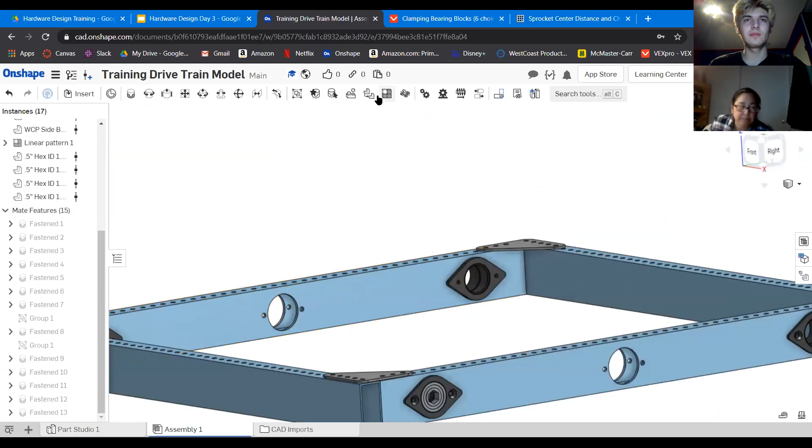This last one, and then we'll just assembly pattern it onto the other side. Let's do a linear pattern: 1, 2, 3, 4. Direction at 19 was the distance, and one in the other direction, and it goes right there. It all works out.

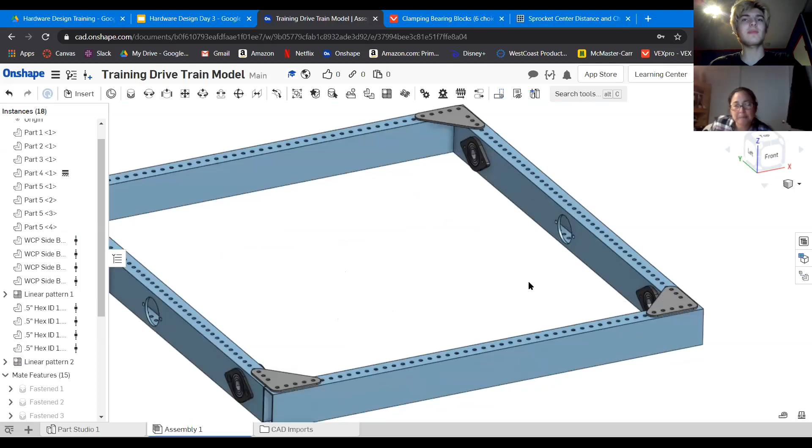And I think that's as far as we'll go today. Next time, I think we're doing gearboxes and belt reductions and chain reductions also, so we'll put a gearbox into this spot here. You can also put on some shafts and wheels next time, maybe. So that's something to look forward to. I'll stop the recording here.